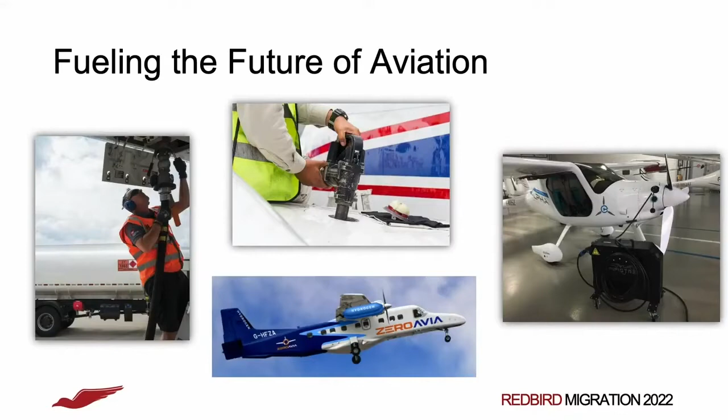So let's go ahead and start. If we look at the different types of fuel that we look toward the future, obviously we're all familiar with jet fuel, but it's changing. We're going to have to start using sustainable aviation fuel, and we're going to have to start using a lot of it. So I'm going to touch on that. Talking about electrics, of course, talking about hydrogen, and then I'm going to pass it off to Walter to do what we all know is the issue du jour right now, which is AvGas and what we're going to do with the lead that's in it.

So let's start in talking about electric propulsion. There's two types of aircraft out there that we're really concerned about now that we're trying to get certified. CTOL, conventional takeoff and landing type aircraft, and eVTOL. Some of the eVTOL aircraft, like Joby, if you look at Joby, it's got wheels on it. Why is that? Because they want to use the wing form and the fuselage form to be able to create lift and be able to certify as much as possible under Part 23, because we spent years and years trying to redo that regulation, so it's a more common sense way to use international consensus standards to certify an aircraft.

The other thing I want you to look at is look at cockpits that are out there right now. Is that a whole lot different than what you're already used to if you're working with modern type of panel technology that we have? No, it's very easy to adapt. You might have a side stick controller and that, but those that fly Cirruses and other aircraft, Columbias and things like that, people are starting to get used to them, and we know it's very easy to adapt to. So it's not that different.

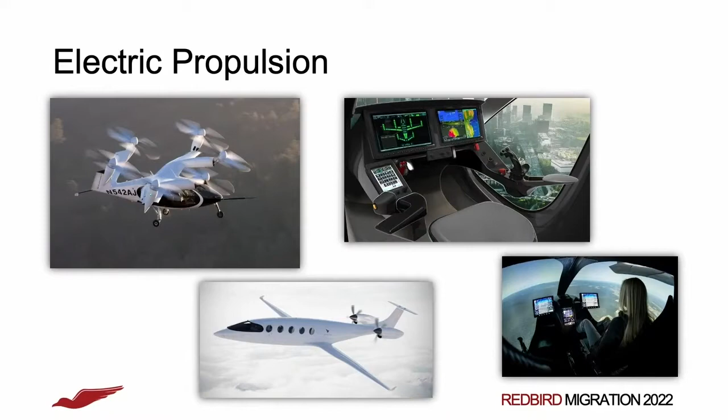Some of the displays we're working on to make as friendly as possible, but on the electric aircraft themselves, they're very simple to fly. They have a large degree of automation, but there is great variance between them. I've flown the Joby Sim and I've flown the Beta Sim. Huge differences between those aircraft and how you use the automation. So we'll touch on that for a second.

These are just GAMA member companies and the different designs that are out there. Now, many of these aircraft in first stage are electric. That'll have very short range, all electric. Most of them will have a hybrid capability with them, and I'll touch on that in a second. But notice that it's a big mix of CTOL and eVTOL. You'll see very shortly in the next few weeks Alice's first flight, which is an Israeli company, Eviation, that's up in Arlington, Washington. And notice Eviation's aircraft down on the second row, second from the left there.

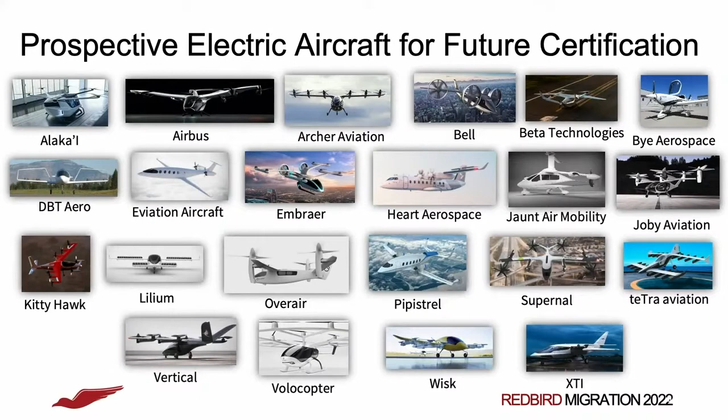It looks like a business jet with two electric motors, 8,000 pounds of batteries and 9 seats, but it just looks like a conventional aircraft. A lot of these companies are trying to get airplanes in the air using current standards, using as much as we can without having to create new things that the FAA would have to promulgate, and we know how long that takes. Also note on the chart there, and again, these are just GAMA member companies, but there's some traditional manufacturers that have jumped into this with both feet.

Bell is no longer Bell Helicopter. Bell is Bell, and their logo is a dragonfly for a reason. If you go ahead and look at Embraer, their Eve consortium is going to go public in the next few weeks. And it's going public because they see the tremendous potential. And they're end-to-end. They're not just the machine itself. They're talking about the whole air traffic control system that they can sell into the developing world as an entire end-to-end capability to be able to get their eVTOL aircraft up and running.

And any of you who have been down to Sao Paulo see how much helicopter traffic is just in that city. It's phenomenal. It's nothing like what we have here in the U.S. So pilot training to this audience becomes very important. So what are we trying to do? Well, right now we're having a big roadblock within the FAA because they created this stupid thing many years ago called powered lift. We, as an industry, protested against it, but the FAA forged forward and created this pathway called powered lift. And right now, the FAA can't get out of its own way.

It's bureaucratic paralysis, because flight standards in the FAA does not know, once we certify these aircraft using Part 23 and special conditions, how to translate that into being able to fly them with operational rules. And it's a big conundrum, and we're having to push this up. In fact, Walter and I are working with the FAA next week to try to unstick this, but for years it's become a real stumbling block.

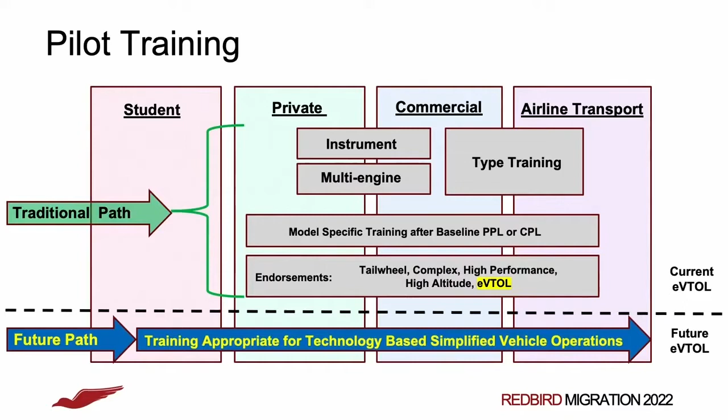But there's still things that we all know that humans can do better than computers. Right now, you know, all of us, when we try to use Siri or any of the other voice technology out there that translates, they can't get it right half the time. There are things that we need humans in the loop for. So this is an ongoing process that we've got with the FAA right now.

Also, if you're paying attention, big companies are very serious about what's happening right now. You can produce a tremendous amount of electricity with a spinning turbine. Okay, so now think about hybrid. GE's been one of the pioneers, but Rolls-Royce is with them. Pratt, which is obviously a Raytheon company, they are all very much exploring how much power you can do to augment traditional burning of fossil fuel with other types of electrical motors in that,

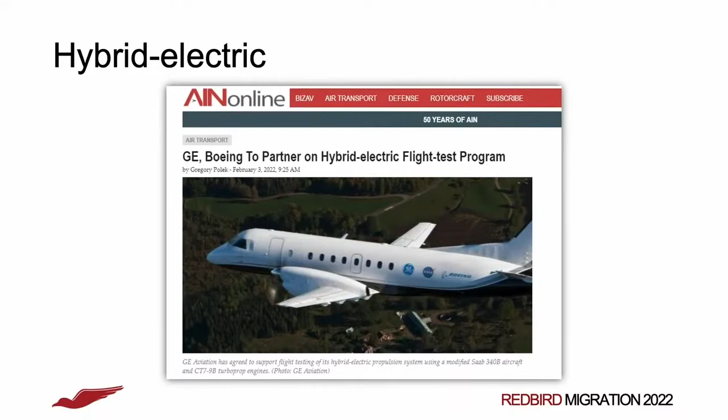and especially in the regional airline world, there are some interesting possibilities out there, and that's why you've got Boeing, Airbus, Embraer, all of these companies exploring electric power in that region. So now let's touch on hydrogen. Okay, again, not a fossil fuel.

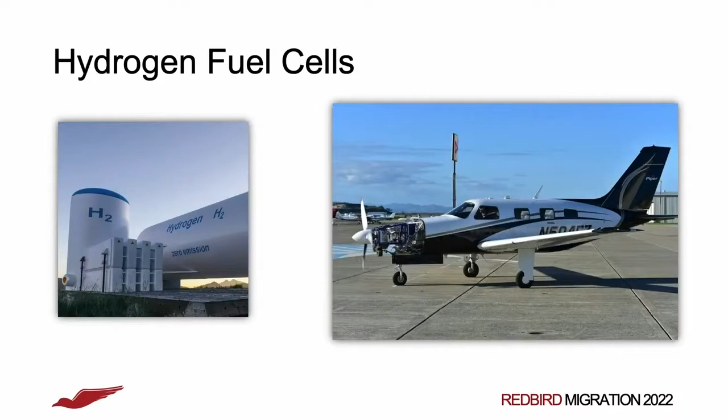Now what I'm talking about though here right now in where we are in technology, we're not talking about burning hydrogen. Hydrogen you can burn, but you've also got to cool it to be able to get it into the combustion chamber to be able to burn it. So that's cryogenic cooling, that's all kinds of technological leaps that we have to have to be able to burn it. And then ultimately when you burn hydrogen, you still have things like NOx, you still create contrails, so you have problems that we're already being challenged with by a lot of environmentalists about contrails and everything else.

But when you change the thought process in hydrogen, you talk about using gaseous hydrogen and a distribution system that gives you very lightweight containers that you can then adapt into an aircraft and be able then to use a hydrogen fuel cell to produce the electricity you need to drive electric motors. You start to change the paradigm out there. Now, obviously, do we have a hydrogen infrastructure right now? No. Are there companies out there trying to build it for not only aviation, but so many other purposes in the world? Absolutely. There is a lot of potential there.

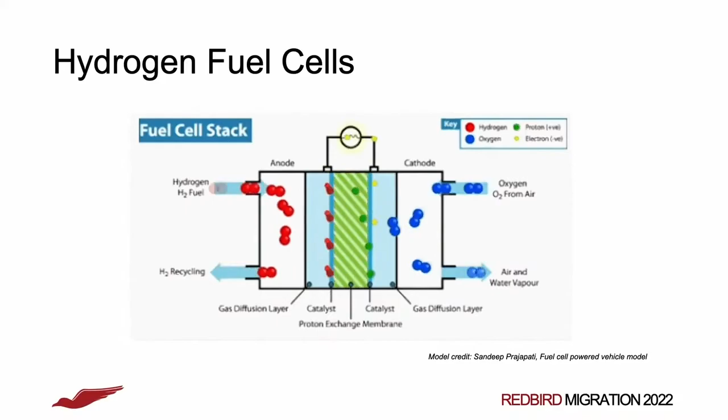So I showed you a picture of ZeroAvia, some of the work that they're doing in the UK, but also in the US, and more companies are looking at hydrogen fuel cell technology, the delivery of hydrogen to be able to power aircraft. So when somebody talks hydrogen, think of gaseous hydrogen, don't think about burning the liquefied hydrogen, for at least this point in time. So the hydrogen fuel cell is just directly in the powertrain.

The advantage of an electric motor, we all know, and in fact Jerry and I were talking the other day when Redbird was looking at a diesel motor, the pulse that you get, the actual pulse that you see when you slow that down and look at it under a camera that can capture time and watch it very slowly, the pulse that you send up there is pretty dramatic. If you use electric motors, you start to get rid of a lot of that. And electric motors, we all know, you can have a 10,000 hour TBO on an electric motor. So we start to change also the maintenance dynamic when we are able to use electric.

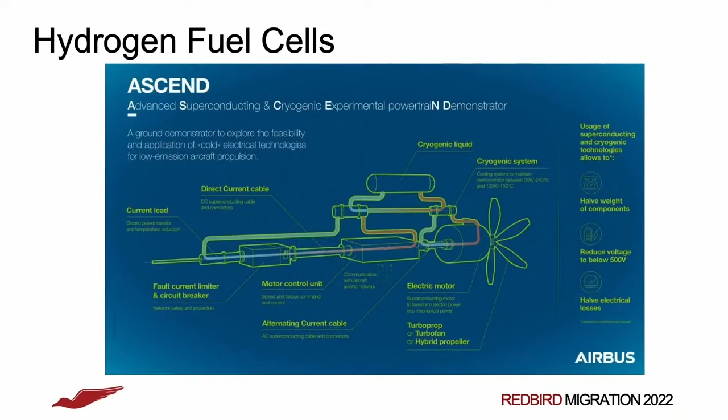So having the hydrogen fuel cell in the powertrain allows you to reduce some weight coming from carrying a lot of batteries, and there's a lot of potential that we're looking at out there. So now let's switch to Jet A. We all know Jet A is cheaper than AvGas right now.

It's very abundant. We know how to produce it, but unfortunately, now if you were in a perfect world, and it was all clean sheet and you say, who should be burning up the last set of dinosaurs out there, it's probably aviation, because we've got the tougher challenge to transport people in an aluminum or carbon fiber tube at very freezing temperatures, high altitude, and we should be the last ones to use it. But that's not how the world is going.

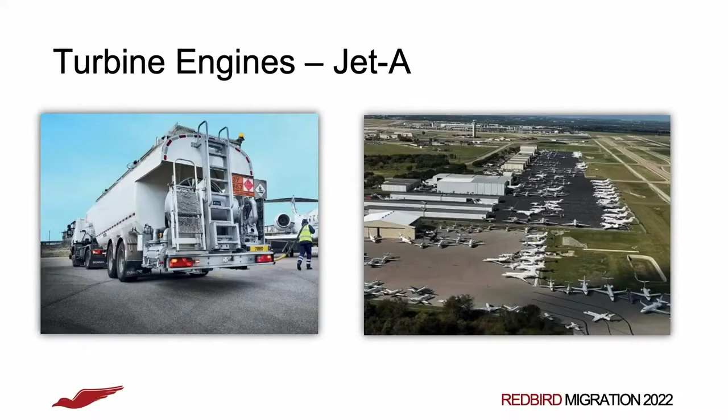Our survival depends on being able to find something to help us with jet fuel, and that is sustainable aviation fuel. First of all, and I'm going to say this a couple times, sustainable aviation fuel is jet fuel, okay? Whenever people say SAF, you've got to also put back in your mind, it is jet fuel, because once it's formulated in the different amounts of mixture we're allowed to use with the feedstock that's put in there, it's recertified under ASTM standards to become jet fuel.

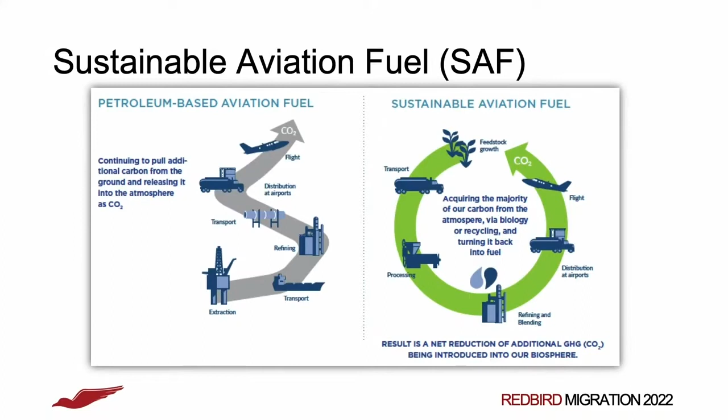So we all know the normal path for petroleum. With sustainable aviation fuel, you get credit for how it is grown and all of the cycle that's involved in it, and that's why all the energy of the airlines right now, and you're talking global airlines, business aviation, everybody that's burning turbine fuel is focused on SAF, sustainable aviation fuel.

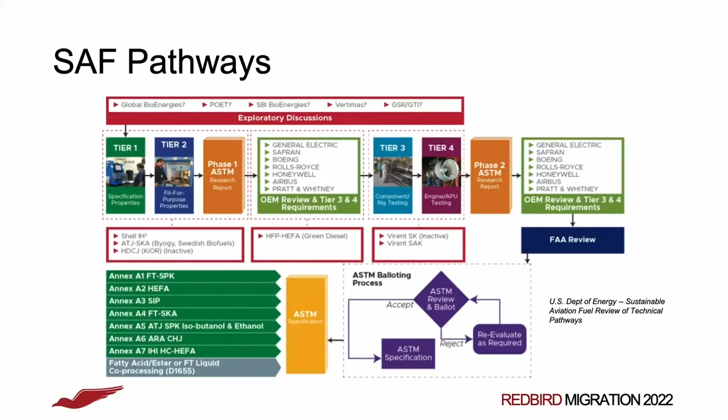Now, this is a very busy slide, and all I want to do is point out in the different pathways here, look at how many times ASTM is in that process, because it's going to be important when Walter talks in a few minutes about AvGas and our transition here. But what I want to focus on is the lower left-hand corner there, the different pathways. So right now, we have 7 authorized pathways that are out there. Each one of them are a little bit different.

So one of the things that we've learned, those of you that have been paying attention to SAF know that our requirement right now, we can blend no more than 50%. Why is that? Because some of these pathways don't have enough aromatics in it, and you have to start adding aromatics to be able to make the seals and everything else work on our aircraft. So right now we are limited to 50% blend, but virtually all the engine manufacturers are testing with 100% SAF. But not all these pathways get you an ability to be able to use 100% without augmenting it with those aromatics.

There are certain pathways that have aromatics in them or specifically put it in. There's also some that are more useful than others. Out of all of these, sugar is probably the least productive. You can only blend up to 10% when you're converting sugar into SAF or to the neat additive that you put into it to be able to use it. The rest of them you can go up to about 50%. The other thing is there isn't enough feedstock out there that any one of these will do it. We need all the feedstocks going.

If you look at cooking grease, I call it the Willie Nelson formula because Willie has a company that's taking cooking grease. Well, who's using most of that? It's the truckers. The biodiesel lobby is using all of that. We have to compete with them to be able to get feedstock for our industry for SAF. So it's a very complex problem.

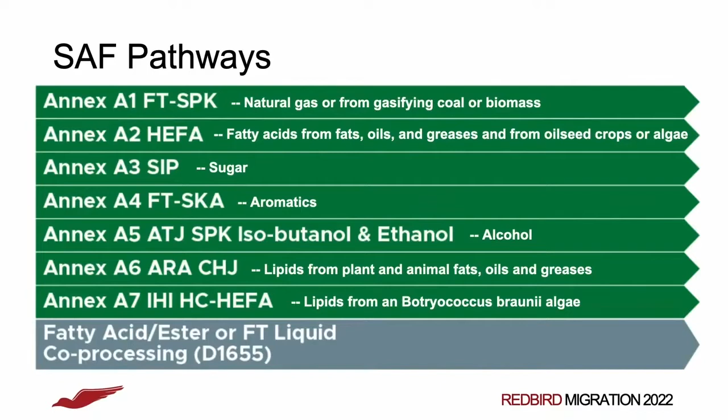The Biden administration put forward the grand challenge that's really trying to boost the amount of government investment, and it was actually in the Build Back Better plan. We're hoping and we're trying, along with our airline brethren, to break out that piece that was in Build Back Better that supports SAF and the government's investment. One of the biggest things that we want to try to do is have the military use more SAF because they're a huge user. Now, obviously, it's going to cost the military more, so there has to be government subsidization, basically, of the cost of fuel for the military to be able to use it. But we're all in this effort together. It's a global effort to try to further develop SAF.

Now, we in business aviation, now you're drilling down to general aviation, everybody that uses jet fuel, and that includes those of you that are operating on diesels. We recently at NBAA last fall made our commitment to 2050 to be net zero in emissions. Now, all of us sitting here in 2022 go, how the heck are we ever going to do that? There's been a lot of work. Well, it's not just SAF. A large part of it is being able to produce smarter aircraft that are more and more efficient, wing designs, lighter materials, doing some things with engine technology, electric technology, and also we're going to have market-based measures to be able to get there.

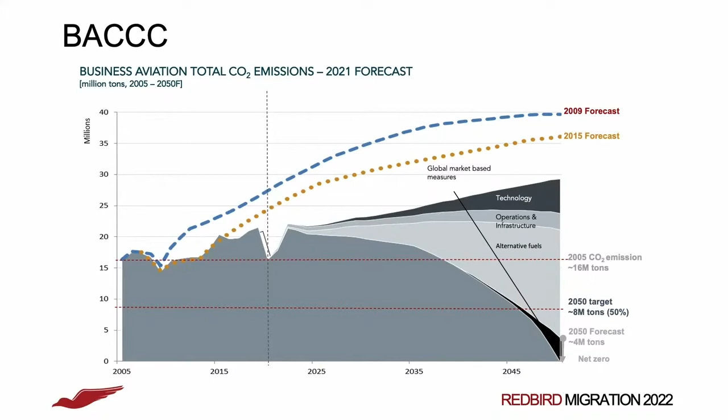But if you see in the sand chart we've been using since 2008, as we revise this, if you look at the wedges that are out there, alternative fuels, which means SAF, is a giant wedge. It's a giant wedge. The only way that aviation is ever going to get to net zero by 2050 is with sustainable aviation fuel. You notice that on the out years, the technology piece grows. We were looking at different technologies, when they'll mature, when you're able to certify them and get them working into the system to provide for that technology wedge.

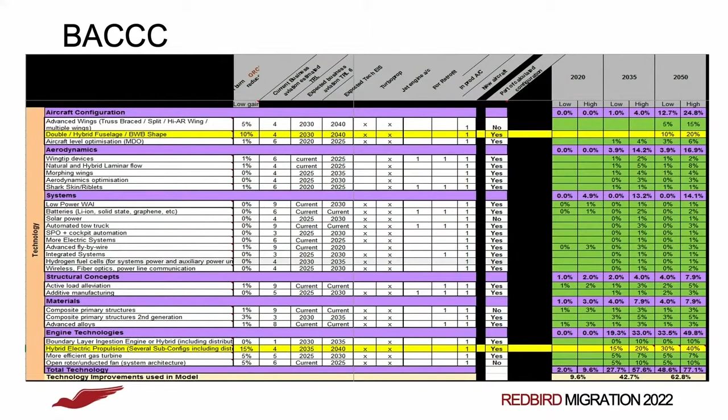And I don't want you to, this is just illustrative for you to look at what all of our companies, and that's the great thing. Craig mentioned how all the GA associations work together. I'm very proud that every single one of the manufacturers, down from all of those electric aircraft that you saw up to all of the jet manufacturers, got together and looked at all the technologies that are out there, and when at best estimate we could actually get it certified, get it into production aircraft, and get it out in the system. And they built this big matrix, and they used all of this to be able to build the technology piece of that sand chart I just showed you to be able to determine what we should be able to do as we go forward.

So the challenge is huge for all of us in the environmental arena, but it's exciting. And I still think, now I wasn't old enough to be around during the very dawn of the jet age, but I look at this time in aviation now. We all know how many people are flying, and we all know what's going on out there. The investment that's coming into our industry, this has got to be what the dawn of the jet age was like. This is such an exciting time in aviation, and that's why I'm so proud to be able to work with Mark and Jack and Ed Bolen and NBAA and all of this, because it's a great time to be in our industry.

So with that, now I'm going to pass on to Walter ZeroAvia, again, our VP for Engineering and Maintenance. Walter's been working the AvGas issue for many, many years. He's been at GAMA longer than I have, I think over about 20 years now. And he is a superstar engineer, so if you got any really tough questions, we're going to have Walter field them as we go to AvGas. Walt? All right. Thanks a lot, Pete.

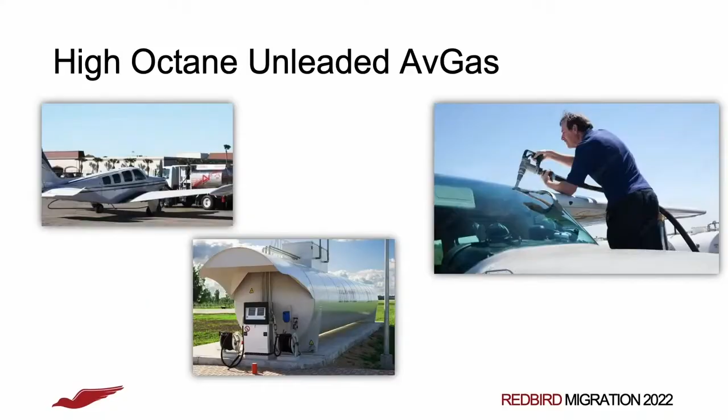So I'm going to talk about AvGas. AvGas isn't nearly as exciting as a lot of the futuristic things and the development and the technology that Pete was talking about in our future products. But it's one of the most critical things facing us today, because today AvGas is supporting our fleet. AvGas is key to general aviation and key to the utility and the viability and the success of the GA transportation system. I could talk for a long time about all the work that's been done, the challenges and the issues that we've had in the past, but what I really want to do is focus forward. Where are we today? What are the things that are facing us, and what are we going to do about it?

So everybody here in GA is very familiar with all the headlines and the current news about what's happening at Reid-Hillview Airport with Santa Clara County and some of the efforts over there to try to ban leaded avgas from the airport. What I want to highlight is this is one of the biggest threats to GA that we have seen in decades. We have talked about avgas for over 20 plus years, all the efforts to move to an unleaded avgas. The pendulum has swung from urgent to less urgent, and the level of effort and investment and activity has gone up and down. But right now we are facing an environment where leaded avgas is going to have some threats in terms of continued availability.

Right now, the approach that's been taken in Santa Clara County is they've hired some firms to do some research, put together some reports. Nothing new about tetraethyl lead. We understand it's a toxic chemical. We understand it has health impacts. We understand that GA is actually a very small contributor, but we are now the largest contributor now that it's been eliminated everywhere else. So nobody's defending the use of tetraethyl lead. There's a continued investment and effort and goal to get rid of it.

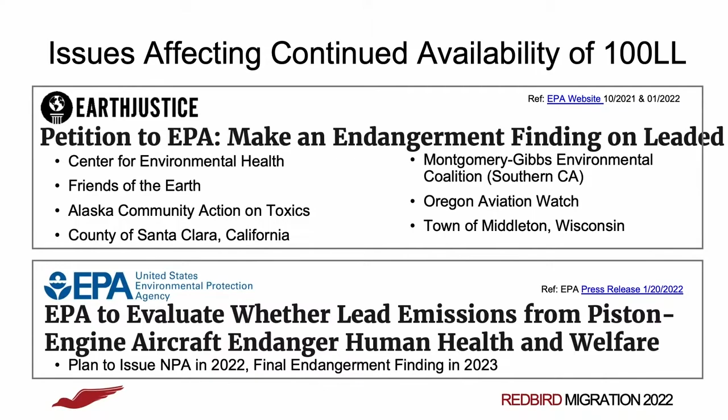The notice of proposed rulemaking to propose the endangerment had already been ready to issue, and so they were able to respond quickly. But in that response, they also put out a press release. And in the press release, they said that they will be issuing the notice of proposed endangerment this year in 2022, and that they plan to issue the final finding in 2023. So that is also a very fast pace when it comes to rulemaking.

Now, it's not limited to the United States in terms of some of the regulatory actions. So in Europe, the European Commission passed some regulations last year in 2021 that are also going to start to regulate and have licensing requirements for the use of tetraethyl lead in Europe. And so that has a huge impact on our fuel producers and AvGas producers, both in Europe, but also the ability to import into Europe.

But more importantly, Innospec is the one manufacturer in the world, the single supplier of tetraethyl lead in the world. All the tetraethyl lead that we have for our AvGas comes from Innospec, based in the UK. Now, Brexit might actually be something that's beneficial for us here. Brexit means that the UK is not directly under the European Commission regulations. They get to consider it and adopt it in the UK independent of what the Commission does. But the momentum is there in terms of the environmental approach in Europe, and the momentum is there in terms of the regulatory action to take a look at how and when we phase out the use of lead in AvGas.

So in terms of what have been the biggest key challenges in identifying a transition to an unleaded fuel for aviation: first and foremost is safety. The purpose of tetraethyl lead in our fuel is to boost the octane up to 100 plus. Octane is a measurement of protection against detonation. Detonation is damaging and harmful and catastrophic for engines if it gets out of control. And so that's what the octane is a measurement of, protection against detonation. And so in our fleet, not all GA airplanes need a 100 octane fuel. We acknowledge that, we recognize that.

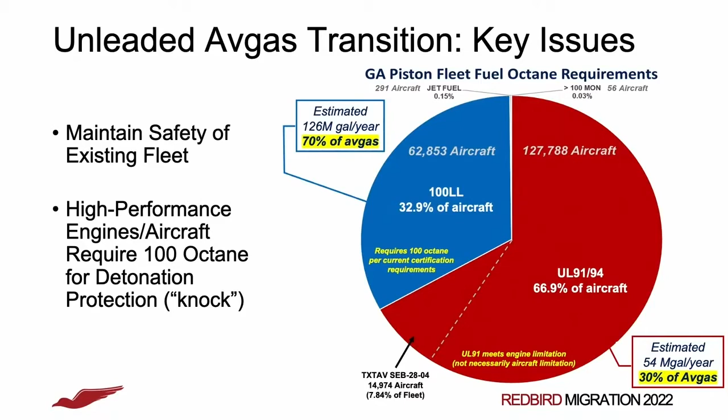So in terms of the biggest issue that we're facing, Pete had talked about SAF. SAF is Jet A. Basically, it's drop-in. So if you ever heard that term, drop-in, that means we're focusing on the fuel, and the characteristics and the performance of the fuel become equivalent to what the system has already been designed, certified, and operating as safe. It's real easy to move that into the system.

In AvGas, when we talk about UL91, UL94, for example, that's basically 100 low lead without the lead added. And so the composition is known, the components are known, the distribution system and the compatibility of that is known. That's essentially drop-in. It's not quite drop-in because we still have to do a placard and things on the wing and in the flight manual, but it's essentially drop-in. And so we're only focusing on the fuel performance, the fuel specifications, and if we identify that, that can be acceptable for use. That's a manageable set of unknowns and challenges to be able to address.

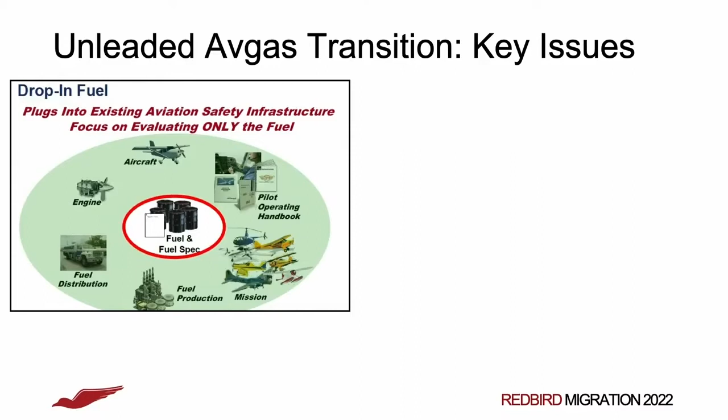However, when it comes to 100 octane, we have not found that. I can go back and talk about 20 years of research and 20 years of effort to find other additives to get to 100, but we haven't found the silver bullet. So a drop-in is not available. So what we're looking at is an approach where it's not a drop-in.

So the key to that is it's not just the fuel performance we're looking at. It's not just the aircraft and the engine and the safety of our products that we're looking at. We now have to look at operations impact in terms of aircraft performance, flight performance, runway performance. We have to look at fuel production, fuel distribution, FBOs and where that is dispensed and used. So it's a much bigger set of unknowns.

And the bigger challenge to that is, from an aircraft perspective, it requires FAA certification and approval at both the make model engine level and the make model airplane level, because you have to evaluate safety of all the performance areas of materials compatibility and all those other unknowns.

But it's not limited to us in aviation. We're very familiar with FAA certification in aviation, but the fuel producers need to do a similar approach in terms of looking at what they need to ensure the safety and compatibility with the production system, to ensure the safety and compatibility with the distribution system, with our airport FBOs.

So when we talk about materials compatibility, we focus on the engine and the airplane because we're looking at it from that perspective. But when we're talking about a potential fuel that is completely different, meaning it has different additives that we've never used before, new kinds of chemicals that are exotic and different, we've just never used them. We don't have experience. That all has to be evaluated by all these stakeholders.

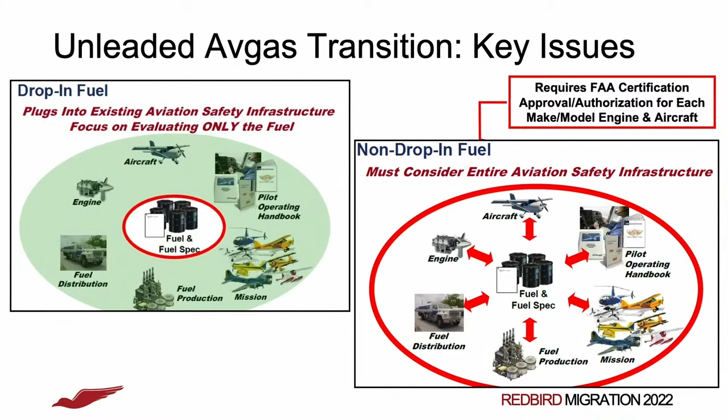Or we have a different fuel composition. So instead of mostly a petroleum-based fuel with 20% of other components added to it, what if it were 60 and 70% other components, chemicals, and only 20 and 30% petroleum? That's a big difference. That has to be evaluated throughout that entire supply chain.

So what have we done and where are we today? So I'm going to talk a little bit about the Piston Aviation Fuels Initiative. It's the name of the program. It's a collaborative government industry program or initiative working together. It was established and developed as a result of a recommendation made by an Unleaded AvGas Transition Aviation Rulemaking Committee,

UAT ARC. So government speak, but what it did is it brought together all the stakeholders from the industry of manufacturers, from the fuel producers, fuel distributors, operators, government, both EPA and FAA, were brought together in an advisory committee role to look at all these challenges, to look at the current state and make recommendations of how do we get over that, how do we start looking at identifying a high octane, 100 octane replacement fuel for leaded AvGas. And what we developed was a recommendation for a program, which is a collaborative program we call PAFI.

But basically what it does is the biggest challenge to fuels being developed and being brought to be available for us was no path to market. Producers weren't investing in the development of a fuel because how do you get it to market? If it requires all this certification, if it requires all this assessment by all these stakeholders, there's an unknown way to get to that market. So we weren't seeing a lot of investment in research and development in developing the fuels. And so this provided a path.

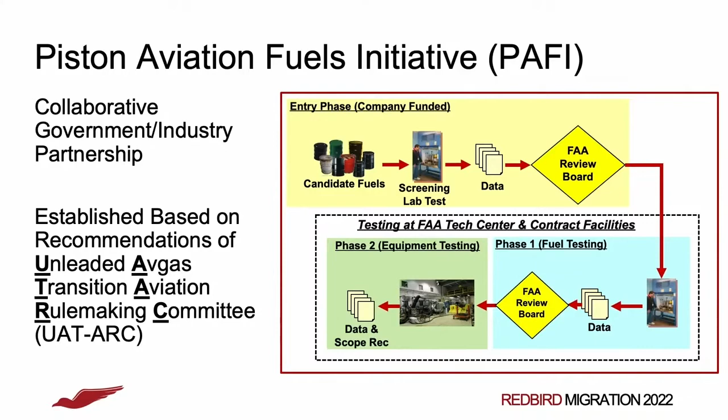So basically the program would bring in fuels, assess the fuels, do phase 1 testing, which is fuel testing, do phase 2 testing, which is equipment testing, engines and airplane. And then that would provide a path to market. So the primary goal and objective of the program was to provide the fuel qualification and testing, and it was going to support 2 primary purposes. One was FAA approval, a fleet authorization approach, an efficient way to assess the entire fleet. Which ones are safe to operate on this particular fuel? Does it meet the needs? And support the ability for the FAA to issue an approval.

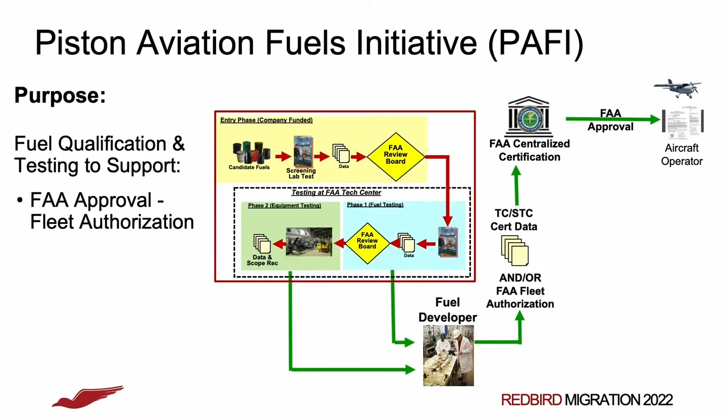The second was, in order to commercialize the fuel for production and distribution, we need to have an industry consensus production specification. So Pete mentioned ASTM. So ASTM is the international standards organization that does specifications for all fuels, automotive fuels, diesel fuels, jet fuels, aviation fuels. All fuels are done through that consensus process. But the importance of that is you have all the experts and the stakeholders from across those different groups providing input in terms of, does the fuel fit for purpose? Does it fit not only from the aviation safety perspective, but production, distribution, and then how they would manage and control that in commercial transaction to get the support and buy-in.

So one of the key things is we need support and buy-in from all those stakeholders. We need it from the manufacturers because we want to be able to use the fuel in our products. We want the manufacturers to be able to incorporate it into future production. We want the manufacturers to be able to honor and recognize warranty for anybody who might switch fuels. They can do that with the knowledge and understanding of the fuel. They can do that with understanding that their considerations were made.

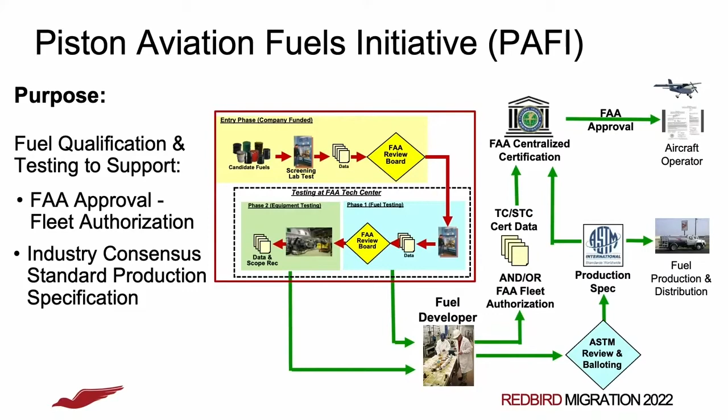So how did we bring those stakeholders together to make sure all those considerations were made for all those different stakeholders? Under PAFI, they had a technical advisory committee, which included the experts from those different stakeholders. Those experts from engine and aircraft OEMs, operator groups, fuel producers, distributors, FBOs, they identified and developed what is the method and approach that we would do to evaluate these fuels. They came up with a very comprehensive matrix of looking at if we were to do a fleet approach to evaluating safety, but also include in those test methods what would be needed on the producer side, the distributor side.

So for example, the materials compatibility testing list. It's not just a list of materials in aircraft and engines, it's a list of materials that were important to producers, distributors, FBOs in terms of tanks and trucks and everything else in the distribution stream. So they came up with a very large, very comprehensive, very complex matrix. Now, not every fuel needs to go through all this. It all depends on the properties of the fuel. Depending on the fuel, if certain areas needed to be evaluated, they would pick and choose from this chart of all the different tests and areas to assess the safety, quality, and performance of a fuel, what would be appropriate to move that fuel through the process.

But the important part here is these are consensus, not only tests, but the test methods, the test plans, how to approach it, consensus of all those stakeholders, and they don't address just the FAA certification piece of it. It's not just a Part 23 airplane airworthiness safety. It's not just a Part 33 engine safety for certification. It also takes a look at what does it take to meet the business needs and the risks and the investment of all the stakeholders, from manufacturers to producers to distributors.

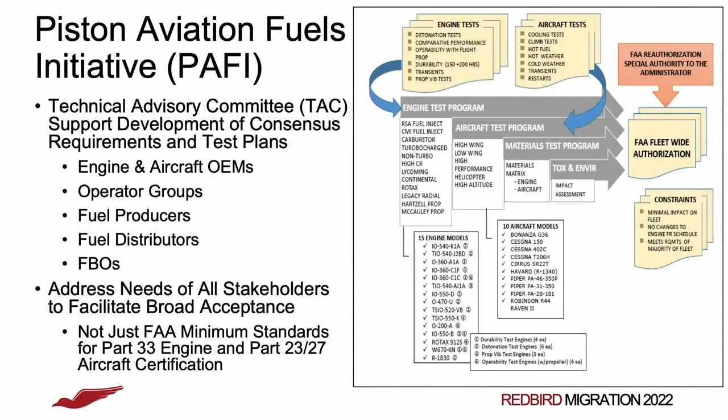So where is PAFI today? So initially, PAFI was set up to basically be an awards type of program, a contract award. We set up the program, the government put out a solicitation for all good candidates, whoever, whatever producer, we're going to provide a path to market. And it'll be fully funded with government funding. And fuels come in, they go through the process, they get tested, and they would down select based on the quality and the performance of the fuel. So that was initially how it was set up.

17 candidate fuels came in. 4 advanced to phase 1, which is the first set of testing, laboratory testing. 2 advanced to phase 2, which is aircraft engine and aircraft testing. Issues were identified with all of them. So we learned a lot. So what did PAFI produce? PAFI produced all the test methods and protocols that are necessary to evaluate a fuel to get broad stakeholder buy-in. It also identified a lot of lessons learned that came in.

So where are we today with that program? So today the program has shifted. It's moved and said, okay, we want to bring in all high octane candidate fuels and start evaluating and considering them. Not just an award, which was the initial program, but it has moved on to the next generation, which is any fuel. Now, it's no longer fully government funded. It's got a stakeholder involvement in terms of joint funding.

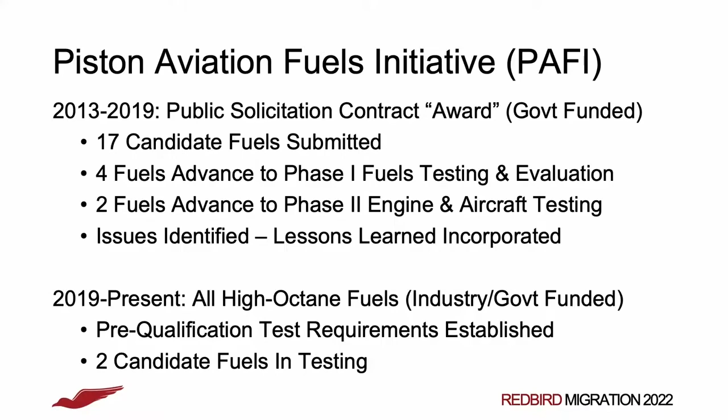There's pre-qualification testing requirements established and defined for the fuel producers or developers to enter into the program. Right now, there's 2 candidate fuels going through that testing. The focus here is still 100 octane replacement. So we're looking for the 100 octane replacement that would be the best fit for the entire fleet.

So where are we today? Today, Congress had asked the National Academy of Science to do a report to take a look at where we are with our transition to an unleaded fuel. And in that report, in 2021, it recommended we've got to not focus just on the one silver bullet, the 100 octane replacement. We've got to start looking at a program that defines a path to get to an unleaded fuel by a certain date. So it recommends a multifaceted approach. Reduce lead emissions in the near term, eliminate lead emissions on some kind of path and plan.

So perfect is the enemy of the good. That's basically the summary of the report. That's what the report says. And it recommends all kinds of other things that we could do in the interim to try to reduce lead emissions. But one of the key things is it does recommend setting a date for an unleaded mandate. The date should recognize new production cut-in, new engines and airplanes, so we don't keep producing and contributing to the challenge of the fleet. And 2, we need to look at R&D in the event that we need to consider a lower octane fuel than 100.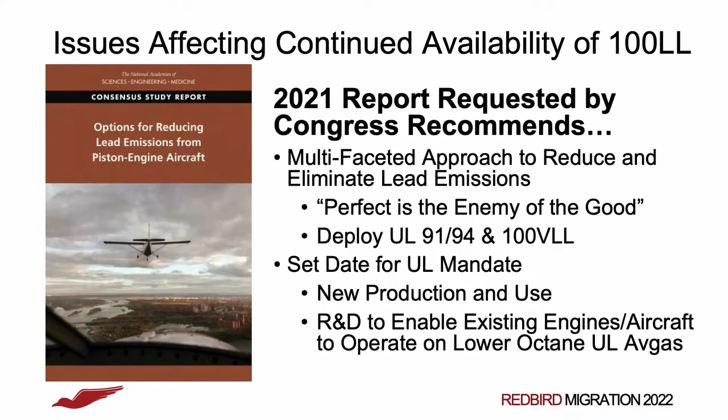So in terms of the endangerment finding, the EPA has a process under the Clean Air Act. The endangerment finding, they said they're going to publish an NPA this year in 2022. They're going to publish a final decision in 2023. We know the result of that. The decision is going to be lead is toxic, lead is harmful. You have to regulate it, and they have to start looking at how to ban it. We understand that. But that's one part of the process.

The Clean Air Act establishes a timeline. And under the Clean Air Act, it requires that once EPA does a positive endangerment finding, number one, that's 2023, next, EPA has to set an emission standard, just like they do today for CO2, just like they do today for NOx. They have to set an emission standard. Once the EPA does that, the Clean Air Act is very clear that the responsibility to implement that standard, to make the mandate, is on the FAA to consider safety. So the FAA has to take that standard and figure out the best way to implement that.

So that's when we talk about a transition. That's the point in time that they'll look at what's available, what are the options, and what should that timeline be that's appropriate. And so these are just estimates, 2024, 25 for that EPA setting a standard. I think the standard's going to be pretty easy.

They're going to say you should not have any lead emissions. So then the question is, what's the appropriate transition date for the FAA to set? Now, the FAA has two parts to that. One is setting the standard for new engine production or certification and design. The next one is how do they retroactively put it into the fleet? That's never been used before. This authorization to regulate fuel composition has never been used by the FAA before. But it's in the Clean Air Act. That is one way they could do it.

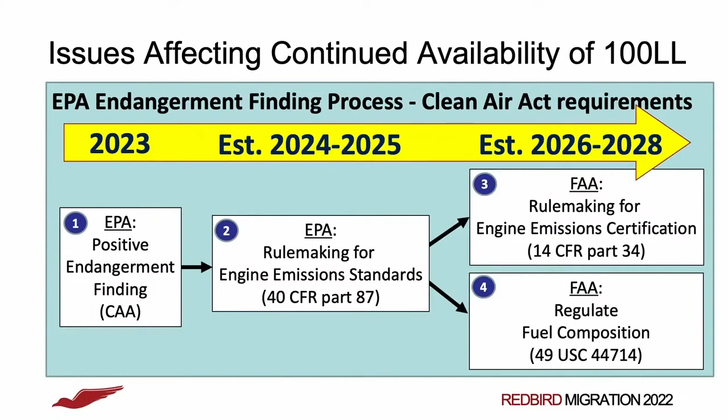So where are we today? So I've got all the GA associations here listed. Pete talked about the partnership that we have with all the other GA associations. There is definitely a need for us to come together to protect GA in light of all the activity that's happening right now. And so when we talk about fueling the future, we talk about putting together a collaborative FAA industry initiative. We've had some in the past, but this one's really got to focus on achieving some key objectives. We need to have urgency and priority towards a solution.

I talked about the pendulum swinging. There's been a lot of urgency and priority in some investment, then it's slowed down. We need urgency and priority today to be able to respond to the threats that we see on continued availability of 100 low lead. We need to be able to chart our own roadmap, chart our path. There's going to be rulemaking to start setting dates and mandates. We can set what we think those right dates are, what that path would be, but we need to have an initiative to take a look at the best way to do that.

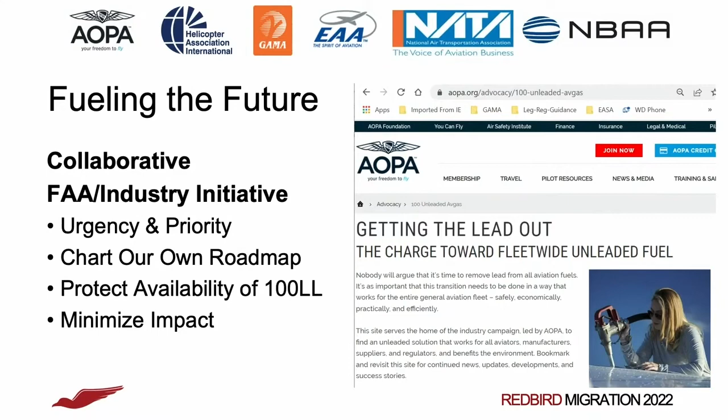Protect continued availability of 100 low lead in our infrastructure at our airports today. That's the biggest threat we face. We need to protect that. That's got to be part of this. And then minimize the impact. Whatever the solution is, minimize that impact. So AOPA has taken a lead for the coalition in really trying to do some advocacy, create awareness, create understanding. And so there's a web page specifically on getting the lead out. And that's going to be a source and a resource for all of us in terms of the latest information, the latest updates as they progress.

As this initiative is coming together, where are we with fuels today? So there's a lot of work here. There's a lot of hope. UL 100 candidates. These are candidates at 100 octane. The Afton Chemical Phillips 66 partnership, LyondellBasell VP Racing Fuels partnership, those are the two that are in the PAFI program being tested under the collaborative initiative right now. GAMI just got an STC last year for a 100 octane fuel. It's only on smaller, lower compression engines, but they're working toward expanding the STC. Swift says that they're working on an STC for 100 octane fuel.

Shell Aviation used to be in PAFI. They have 100 octane fuel. They had slowed down their R&D investment until they saw a better path to market, but there's an opportunity there. So there's a lot of work being done on 100 octane fuels. But those are big challenges to assess and evaluate those fuels and figure out whether or not they're going to be viable to not only replace 100 low lead, but to be economically viable and available in the system. What are the alternatives in case that doesn't work?

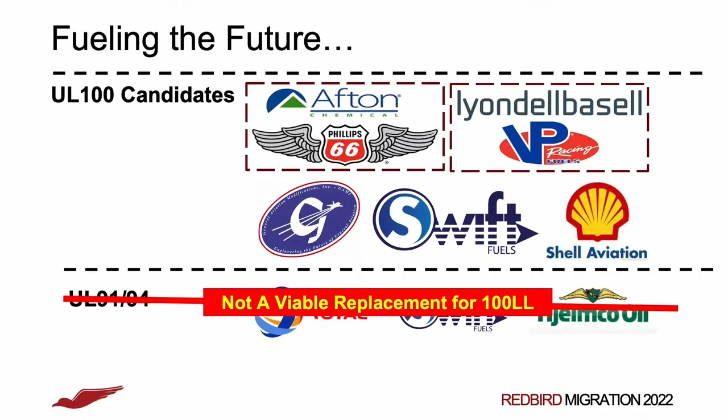So we're looking at understanding where we would be. UL 91/94 is a fuel specification available today. It is not a viable replacement for 100 low lead. I talked about the size of the fleet, the composition of the fleet. That lower octane fuel would not be viable. So because of that, one of the other things that we think an initiative needs to focus on is we need to look at the potential of much higher octane unleaded fuels, but maybe not quite 100. And we know these can be produced today.

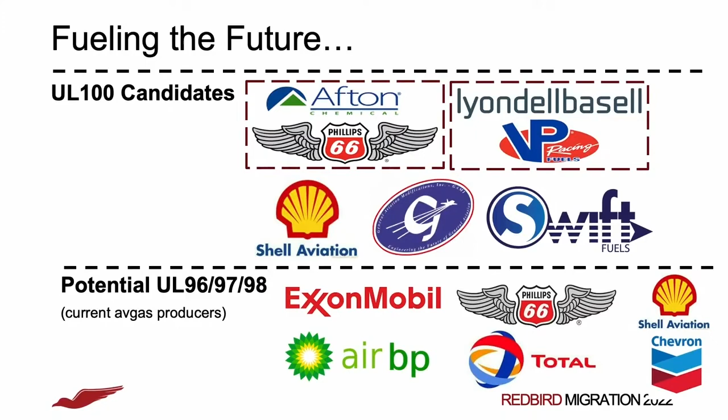Some of the fuel producers have said their 100 low lead without lead, if they use high quality alkylate, if they use their high quality streams, can achieve a 96, 97, 98. I don't know the final numbers because they need some margin for production and distribution, but that's an initiative that could be looked at in the event the 100 octane is not available.

So when we talk about fueling the future, one of the things I wanted to leave you with is, as flight schools training the new people coming into the industry, that's really fueling our future in GA. And so one of the things that you can do is to ensure that there's understanding and awareness out there of what the real situation is with AvGas. Yes, it's a threat, but it's something that's being worked, something that's being addressed. We have paths to look at it, so be informed, sign up on the AOPA website to get the latest information. So with that, open it up for questions.

Mark, you want to come on up here too? Get my buddy up here in case there's another tough one right here.

Hello. Okay. I agree with the fuel part of it. My question is this. The aircraft manufacturers for general aviation, like Lycoming, Continental, and so forth, where are they on this, and how much would it cost to change out an engine? I know Rotax, an Austrian company, they're currently not using 100 low lead. You can use auto fuel in there. So the technology's there. I just think there's resistance from Lycoming and Continental. What's their position on this?

We're in very close contact. Lycoming and Continental are GAMA members. They're very much supportive of trying to be able to move beyond where we are now. But we all know we're flying on 1940s technology. In the automotive industry, they have FADECs, they have electronic ignition, they have all the things that we don't have. What is one of the problems? The bar for FAA certification.